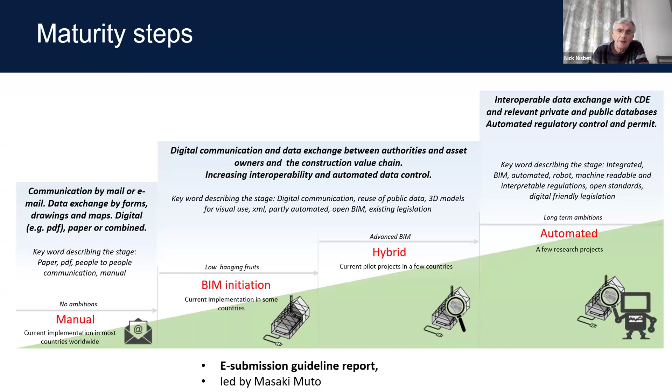In order to encourage that, we have prepared, or are preparing, a document called Guidance for Regulators on the benefits

of OpenBIM, which is the flagship expression of the buildingSMART suite of standards.

And that publication is nearing completion and should be available within the next few - well, if I say the next month or so, I think that will be accurate.

And this is deliberately a document in order to get the message that OpenBIM answers a lot of the questions that regulators

have, or think they have, about automation and shifting away from PDF documents and so on.

Another of our projects is the regulatory information requirements. But before looking at that, I'd like to say a few words about buildingSMART as a whole.

buildingSMART is a not-for-profit organization. It's a network of chapters which are country-based. I think there are now 35 chapters around the world, many in Europe, but increasingly in South America.

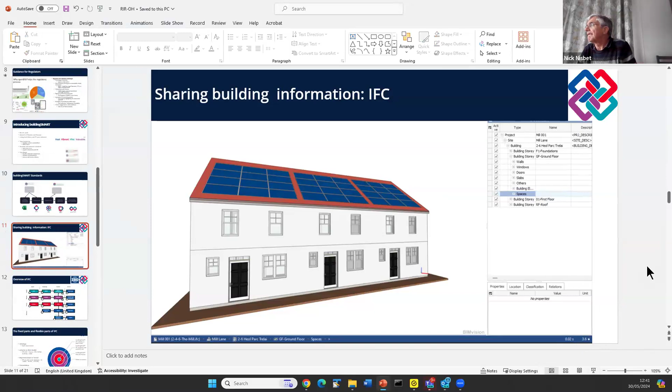Then we can hopefully return. What I wanted to say was most of you will be aware of IFC as being a file format for sharing BIM information, and that's entirely correct. You can use it that way.

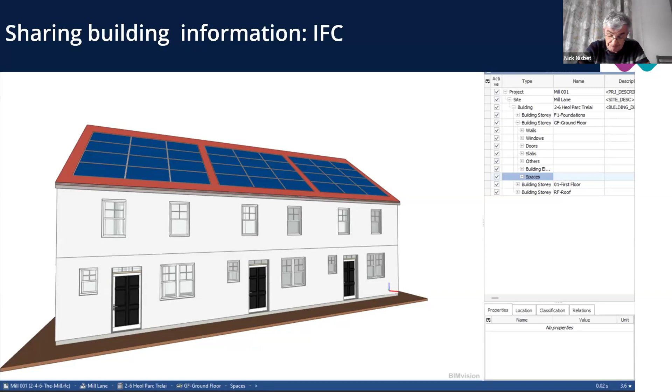In this case, you can see that it contains both geometry in the picture, and on the right, that it contains the geometry broken down into named objects of various kinds: walls, windows, doors, slabs, others, and also spaces, so it doesn't have to only be physical things. That organizes the information and makes it accessible to recipients of the information, and makes it accessible to machines.

I would also mention that there are aspects of the IFC that cover processes like work plans and tasks, and we can represent the resources needed to support those processes in making a change to the built environment. So the IFC is comprehensive enough to support all of the processes around the built environment.

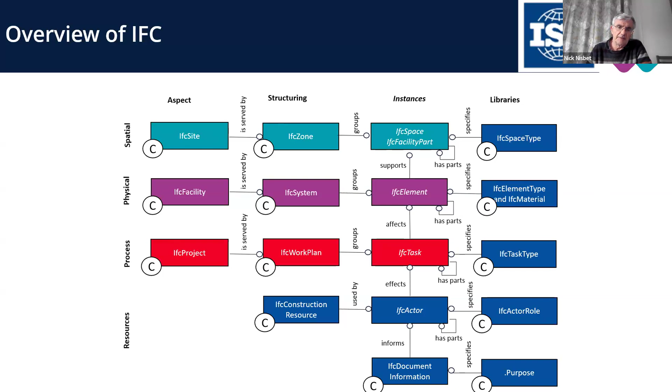Around it, we also have a set of properties and quantities that are part of the IFC standard, but we can extend it further if we need to with the building content and the buildingSMART data dictionary. And of course, any country or any project or any software application can choose to define additional properties for their own needs. So that gives the opportunity to say that we can extend what the IFC is good for by looking at the buildingSMART data dictionary and saying what extra properties are needed.

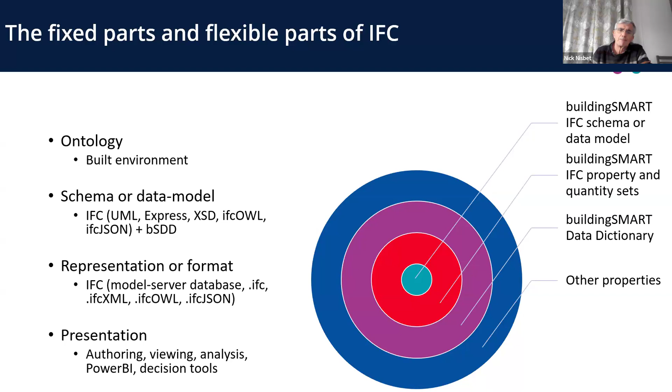In the regulatory information requirements project, that's what we did. We said that although building regulations are different around the world, on the whole they cover similar topics, and within those topics, like safety in case of fire, safety and accessibility in use, and energy efficiency, there are indeed common things that we try and regulate, such as escape distances, door widths and corridor widths, and so on. That suggested to us that the industry would benefit from some recommendations about the common factors or topics that people are addressing in the regulations.

So we're not standardizing the regulations. That's not going to happen anytime soon. What we are doing is saying that in a large number of cases, there is common information needed, which, if present in a building model, would go a long way to preparing building models for regulatory checking, both by designers and by regulators.

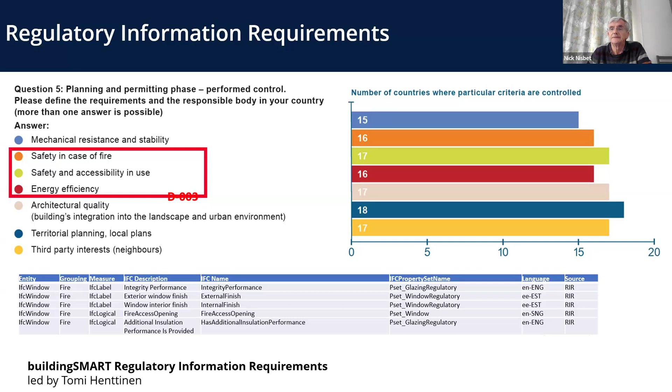My name is Tomi Henttinen, coming from Finland. While preparing for this presentation, I was going through the documents that we have prepared for this or developed during this project, and I found that the first ideas were put together in 2020.

It's been a long journey, and during that journey there has been new legislation, for example in Finland, that was accepted last year, that BIM is coming mandatory. The new legislation is activated January 1st, 2025, and there's a 1-year transition time, and beginning from January 2026, the IFC...

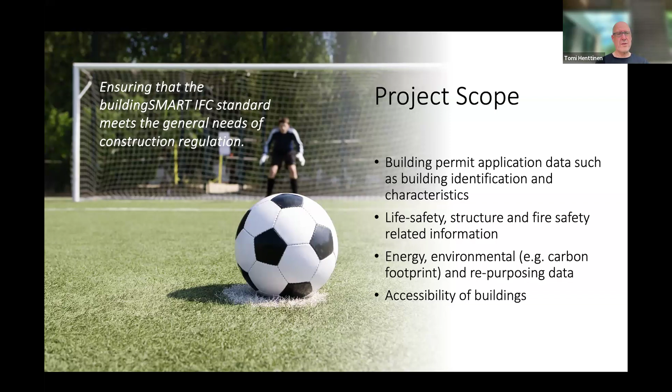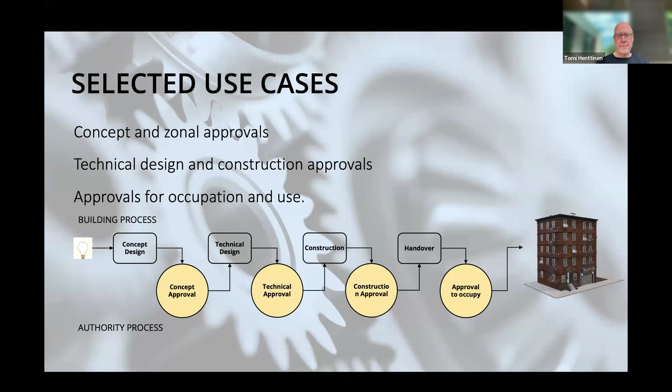Couple of outcomes from these, so maybe a deeper look. So project information and identification, we are looking at location.

There's a large number of different coordinate systems worldwide or even locally. We have here in Finland at the moment, I think, about 10 coordination systems that are used even in parallel sometimes.

That's chaos. Then we have the site and building separation, and then, of course, the standardized IFC solution for these. Identification and classifications and historic classes.

What's the impact of different building types, and then international references such as INSPIRE, which is used here in Europe, and then zones and uses of areas. So we have different zone types and different area and space measurement rules.

Life safety. So for life safety, we have the structural, identification of bearing and non-bearing elements, type of structures, materials, fire protection properties, fire departments, escape routes, suppression terminals, and so on. And then accessibility, access route measurements, wheelchair circles, and so on.

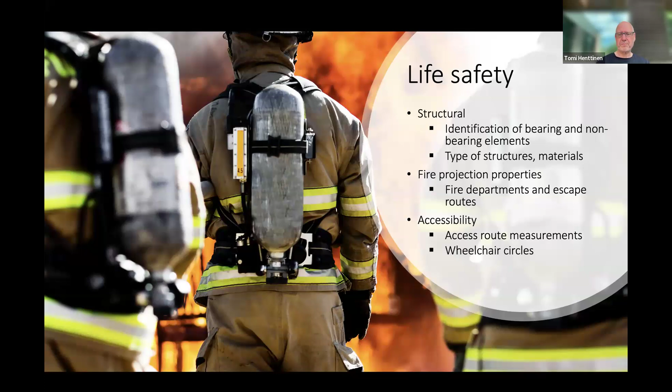And then we have the building performance, which are related to energy use, embedded carbon, environmental impacts in general, energy sources, heating and cooling systems, and then finally demolition and waste.

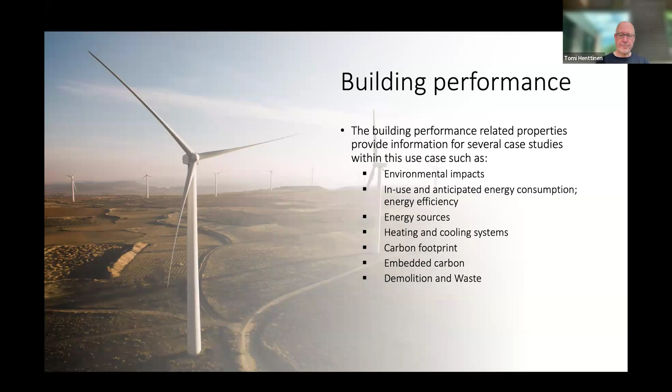And then specifically for accessibility, access routes on site, access routes in the building, doors and door-related requirements, railings and handrails.

Accessibility is not only for people using wheelchairs, it's also accommodation for the visually impaired, accommodation for the hearing impaired, and then other kinds of people from different handicap groups using lifts, chair lifts, and other assistive devices such as hearing devices and so on.

So the work packages that we've been working on have developed a little bit during the process, but in general we have these work packages: of course, project management, including reporting and accounting.

But then we started with the requirements, so we tried to capture the business need. We reviewed the existing IFC PSETs and buildingSMART data dictionaries.

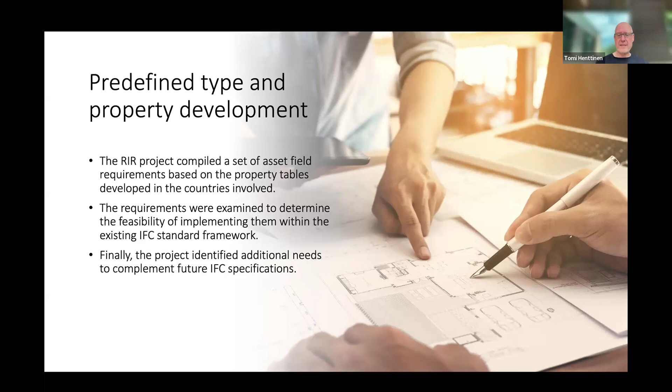We identified additional needs to complement the IFC specifications, not only for properties but also for predefined types, which are subclasses of IFC classes. The deliverables from the project in the final proposal: we have no new classes, meaning we're not proposing any new IFC wall, beam, or window types. But we do have about 180 new predefined types, which are subclasses of those IFC classes, and about 200 new properties, compromised down from the 2000 plus properties we had at one stage.

We are going to publish this into the buildingSMART Data Dictionary. We are also studying how to validate this, developing IDS rule sets, and finally a summary report and some guidance documents.

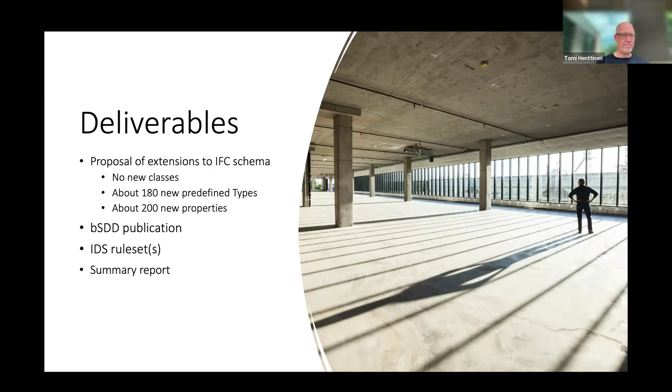So what is the added value of this? We are aiming to improve communication between applicants and regulators. In many jurisdictions, the goal is to automate the checking of models. In order to automate checking and reading information from models, the information needs to be standardized.

As an example, here in Finland, typically annually all jurisdictions put together around 10 to 11,000 building permit applications every year. If we estimate that maybe half of them in the future would be IFC based, then nobody has time to study each model individually. That's just nonsense.

So we need a really harmonized way to present the information in the model, and it should follow standards. It's not only that we have to have the ability in the standard to do this, we also need to teach people to do this.

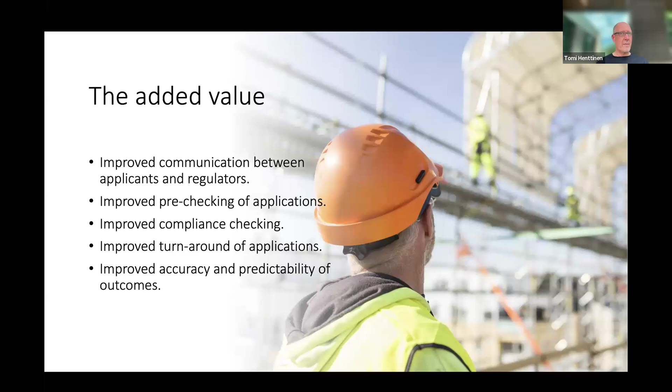So that's my part. Back to Nick. Okay, thanks, Tomi.

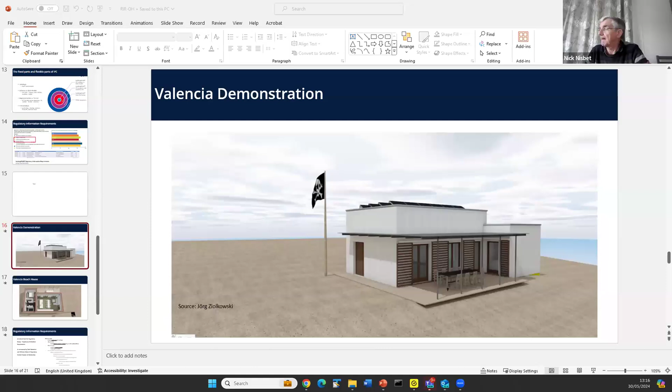What I'd like to do now is share again and take a look at a simple example which we developed at the Valencia conference, which occurred just over a month ago. This was the regulatory domain supporting the building domain in a demonstration of various aspects of the role of IFC and OpenBIM.

As a very simple demonstration that we could pack into 40 minutes, we invited one of the supporters of buildingSMART to write a brief for a beach house. You can see here that an architect has prepared a proposal. The pirate flag was part of the client specification, so we made sure that's there. You can see it is fairly close to the beach. Much to our amusement, someone from the Valencia City Council was in the room, and he immediately pointed out that building within 50 meters of the shoreline is now banned. But we pressed on regardless of this major omission.

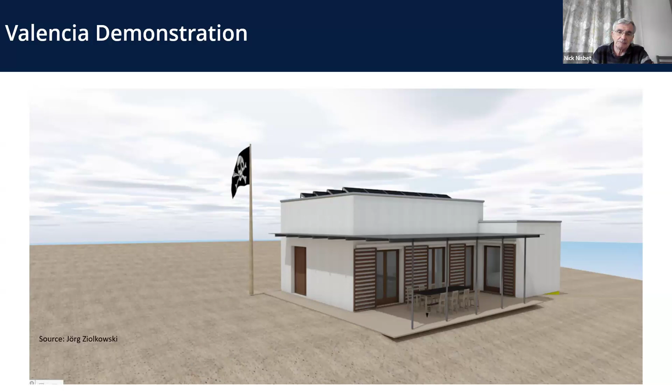We thought it would be useful to examine the proposal. It's a simple one bedroom beach house, but suitable for entertaining, with a nice big awning and an upper terrace as well.

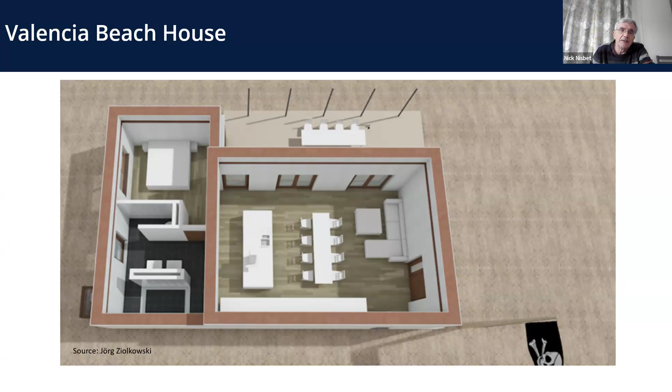The contribution we made was to talk about the regulatory information requirements aspect of this. What we did was pull some very simple items from the regulatory information requirements to illustrate how the workflow might work. So we pulled out things like a unique name for any objects that would have compliance checking applied to them, latitude, longitude, and elevation to locate it, and also to confirm the jurisdiction and occupancy numbers. Another team was looking at building energy modeling information requirements, prepared separately. So these were the kinds of information clients we were interested in.

And the reason we were interested in it, that we'd prepared a Valencia building code for residential buildings. And you can see here that it had 3 clauses: identification and location of the building and the site,

health, well-being, accessibility. So there was a requirement that habitable rooms should have windows of a certain minimum area, and that doors should have at least 800 millimeter clear width. And then sustainability: there was a requirement picked up from the building energy modeling information requirements that items in the external envelope should have a thermal transmittance not exceeding a certain value, and that doors and windows should have an adequate solar reflectance to resist summertime overheating.

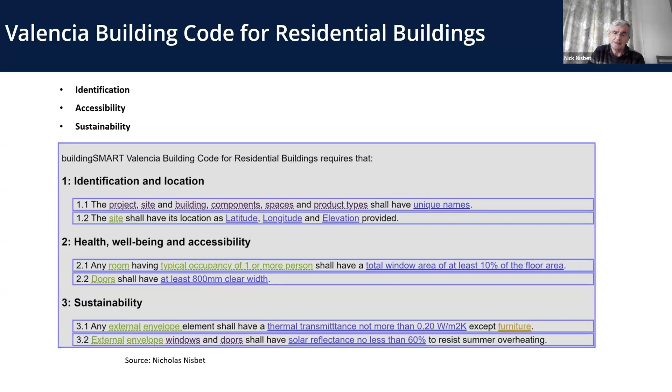So these regulations seemed relevant and interesting and varied enough. And what we were able to show was that not only could we check that the information required was present using IDS, but we were also able to go on and actually generate an automatic compliance checking system.

So I think the role of the regulatory information requirements is to make sure that projects can be prepared with the right basic information, and that any individual or organization, or indeed building inspectors, will be able to have methods of inspection.

It could be automated, but going back to the stepwise approach, we'll also be able to automatically generate reports which tabulate the information that's being assessed, and maybe accelerate the manual process by just making the information more accessible to the people who are charged with doing the assessments.

So a nice little exercise, all in 45 minutes, and I've compressed it into 5, which is probably not fair. But what we can do now is just say, we presented what we're doing and what we've done.